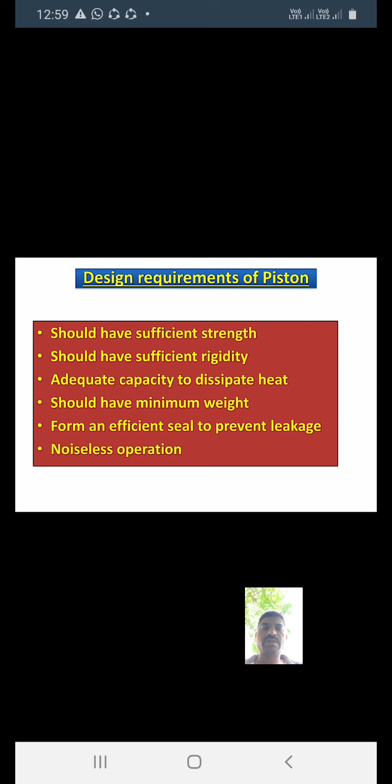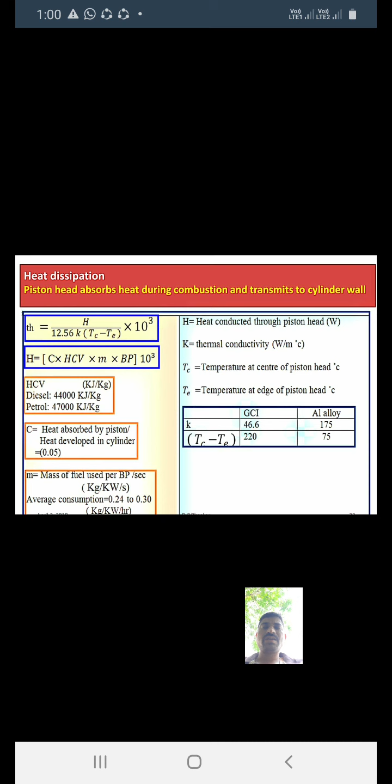In yesterday's lecture, we have seen the piston, the function of the piston, and design requirements of the piston. We also saw the piston head, its strength, and heat dissipation. When you calculate both values, as per strength and as per heat dissipation, whichever value is greater, that value you should choose for the design. Yesterday we saw the formulas as per strength and as per heat dissipation. We also saw piston ribs and cup, and you have to calculate the total rib thickness: greater than 6 mm, or less than or equal to 6 mm. We also saw the radius of the cup, discussed in detail yesterday.

Today we will go on to the piston ring. Also, in yesterday's lecture I told you about the piston ring. The piston ring is put into two groups.

First is the compression ring. In the figure I have shown the top compression ring, and second is the second compression ring. Also you have to use the oil control ring, also called the oil scraper ring.

The compression rings are placed in the groove provided on the piston barrel. The function of the compression ring is to seal the space between the piston and piston cylinder liner, and to prevent leakage of gases past the piston. The second function is to transfer heat from the piston to the cylinder wall. Remember these functions for the compression ring.

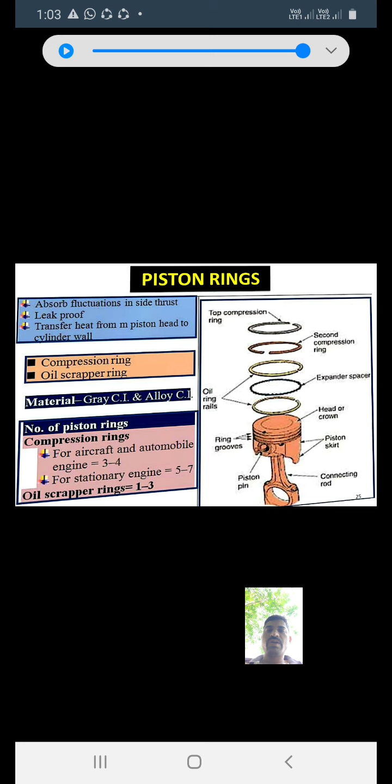Then we find out the formula for the number of piston rings, in the compression ring and oil scraper ring. For aircraft and automobile engines, 3 to 4 piston rings will be used as compression rings, and for stationary engines we use 5 to 7 rings. Then next is the oil scraper ring, we will use 1 to 3 rings.

Then next, dimensions of the cross section of the ring. We want to calculate the radial thickness of the piston ring, denoted by Tr, the radial thickness of the cross section. When you take the cross section of the ring, Tr is equal to D into root of 3Pw divided by sigma-all, where sigma-all is the allowable bending stress given for the piston ring, in Newton per mm square. This is also called the radial width.

And how to calculate the radial width of the ring? Radial width is denoted by Br, given by D into root of 3Pw divided by sigma-t. With the help of that formula you can calculate the radial width of the ring.

So Z is equal to the number of rings. Axial thickness of the ring is equal to 0.7 Br to Br, and H minimum is D divided by 10Z. This is the axial width of the piston ring, denoted by Br.

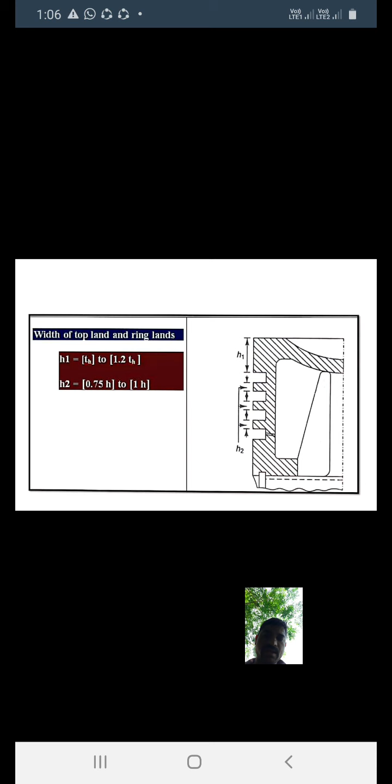Then width of the top land and ring land. There are two types, top land and ring land. This width will calculate H1 and H2. H1 is equal to 1.2 TH, this value is given. H2 is equal to, shown in figure, check the distance between H1 and H2, H2 is equal to 0.75 H to 1 H.

Then see the piston barrel. What is meant by piston barrel? The piston barrel supports the piston head. This piston barrel we have seen in the main figure in the first lecture. Piston barrel supports the piston head and provides the seat for the piston ring. Below that piston barrel there is a piston ring, and this barrel sits on that piston ring for effective heat flow. The thickness of the piston barrel is denoted by TPH. Under the ring is equal to the thickness of the piston head, TPH.

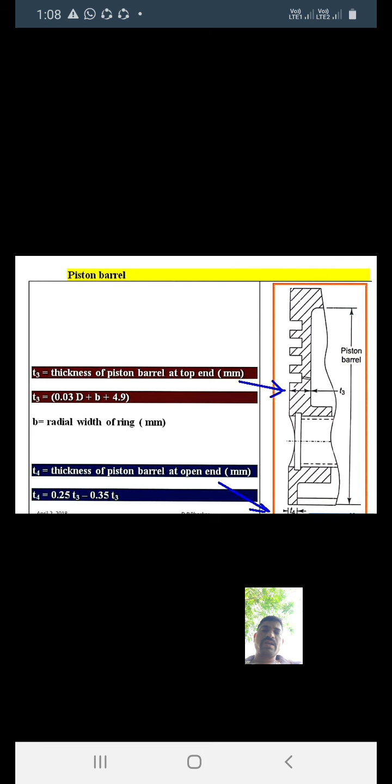Then we want to calculate the thickness of the piston barrel at the top end and at the open end. There are two ends. At the top end this is denoted by T3. How do we calculate this value? With the help of radial width we can calculate the thickness of the piston barrel at the top end. T3 is equal to 0.03D plus B, where B is the radial width of the ring, plus 4.9. Remember that formula, you will get the thickness of the piston barrel at the top end.

Then T4 is the thickness of the piston barrel at the open end. This value is also given in mm. How to calculate this value? Once you have calculated the thickness of the piston barrel at the top end, with the help of that you can calculate the thickness of the piston barrel at the open end, denoted by T4. T4 is equal to 0.25 T3 to 0.35 T3. With the help of that formula you can calculate the piston barrel.

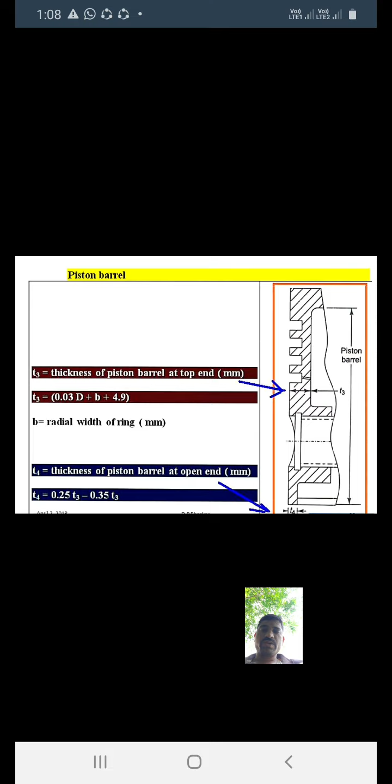Then next is the piston skirt. What is meant by piston skirt? The portion of the piston barrel below the ring. We have seen in the main figure, this portion of the piston skirt is placed below the piston barrel ring section, up to the open end. This portion is known as the piston skirt. See this portion in that figure, I have shown the piston skirt portion.

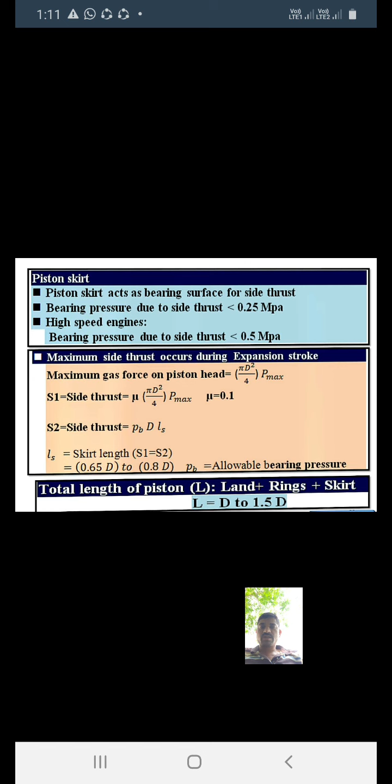How to calculate that skirt's length? You know S1 is equal to S2, meaning width of the top land plus total width of the piston ring plus total width of the land plus length of the piston skirt. If you make the summation of all that, then you will get the length of the piston, denoted by L. With the help of that you can calculate the length of the piston, taken as 1 to 1.5 times d.

S1 is the side thrust. How to calculate it? Mu into pi d square divided by 4 into P max, area into P max. This mu value is 0.1. This coefficient of friction depends on the type of material. S2 is the side thrust, calculated as PB into D into LS. This value you can calculate with the help of that formula.

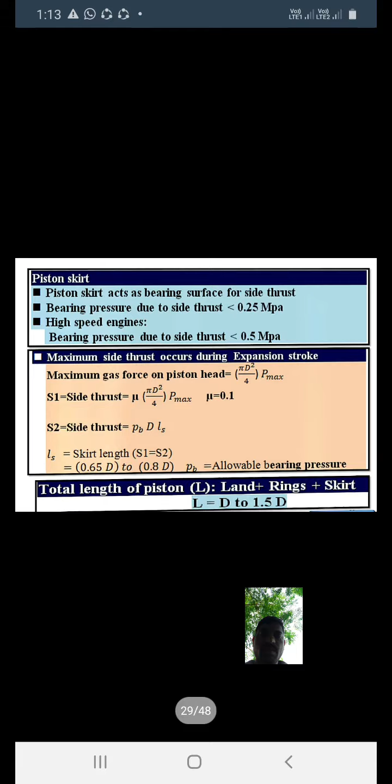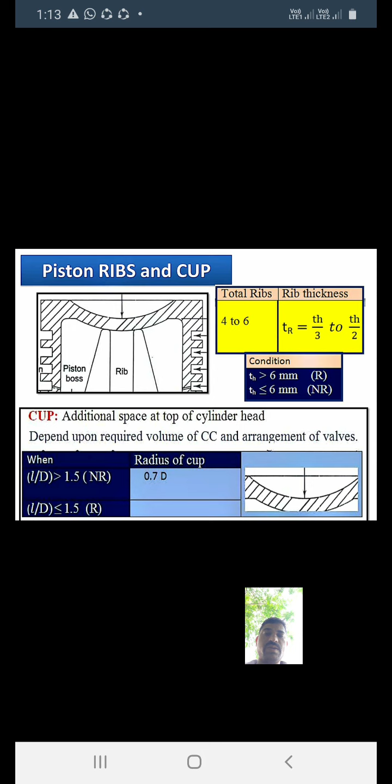There are some limitations we have seen: if TH is greater than 6 mm, ribs are required, and if TH is less than or equal to 6 mm, ribs are not required. Remember that relation, we'll use it here.

Then piston and piston pin. What is the piston pin or gudgeon pin? It is also called the wrist pin, and it is the link between the piston and the connecting rod.

The thrust developed by expanding gas is transferred from the piston to the connecting rod. The gas force should be transferred in between, from the piston to the connecting rod, through the piston pin or gudgeon pin.

We'll see the details of the types of connection between the piston pin and the piston. What is the relation between the piston and piston pin? There are three types: full floating, semi floating, and fixed.

Full floating means the piston pin is free to rotate both in the piston boss and the small end bush of the connecting rod. The end movement of the piston pin in the piston boss is restricted by using circlips at the ends. See, there are two circlips, snap rings connected to the piston pin, with the piston pin and connecting rod in between.

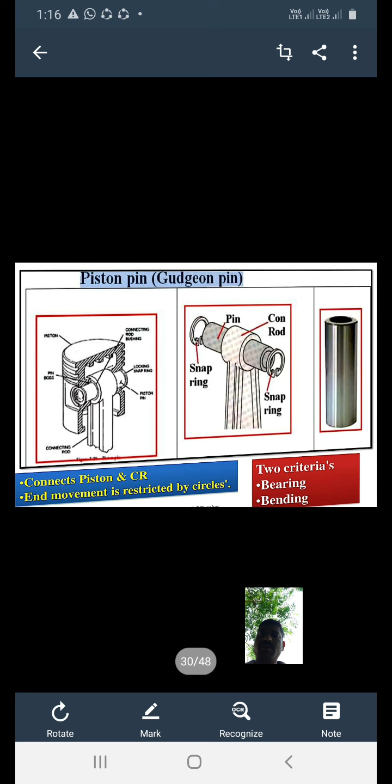Then we will see the design of the piston pin. There is a piston boss, and the small end is connected to the connecting rod. There is a piston pin in between the piston boss and the connecting rod.

In order to offset the turning effect of friction, the center of the piston pin should be 0.03D above the center of the piston skirt. We will keep that distance, 0.03D. The piston pin, as seen in the figure, is supported in the piston boss.

In order to reduce the weight, the pin is usually made hollow. The maximum load acting on the piston pin is the maximum gas force, shown by P, which is given by Fg max, the force on the piston, equal to pi by 4 d square into P max.

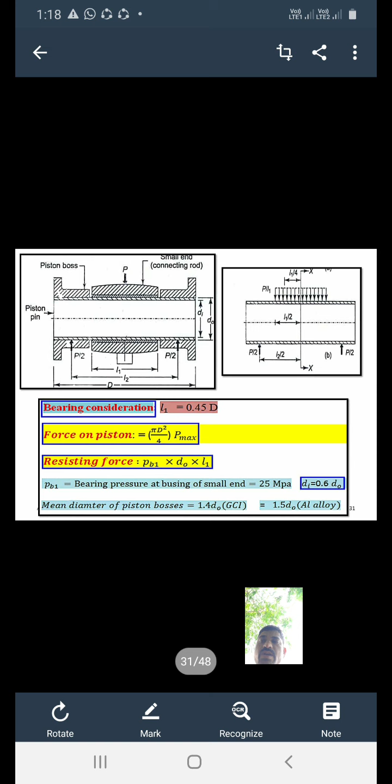The piston pin is subjected to bearing pressure, direct shear stress and bending stress. Remember that. The piston pin is generally designed based on the bearing pressure consideration, and then checked for direct shear stress and bending stress.

Here, do is the diameter of the piston pin, di is the inner diameter of the piston pin, as shown in the figure. The length of the piston pin in the connecting rod bearing is given in mm, and capital D is given for the piston diameter.

Then, considering the bearing pressure between the piston pin and the connecting rod bearing, Fg max is equal to L1 into Pb1 into do.

Use this formula for the resisting force. Pb is the permissible bearing pressure between the piston pin and the small connecting rod. Its values are given in the table. With the help of that table, you should check the bearing material and the related value. You will get the value of Pb, the permissible bearing pressure, as per the material.

If there is an aluminium alloy, then this Pb value is given in Newton per mm square as 5 to 10. And if you have cast iron, this value will change, you will get it in between 10 to 15. Remember that. As per the material, this value will be changed.

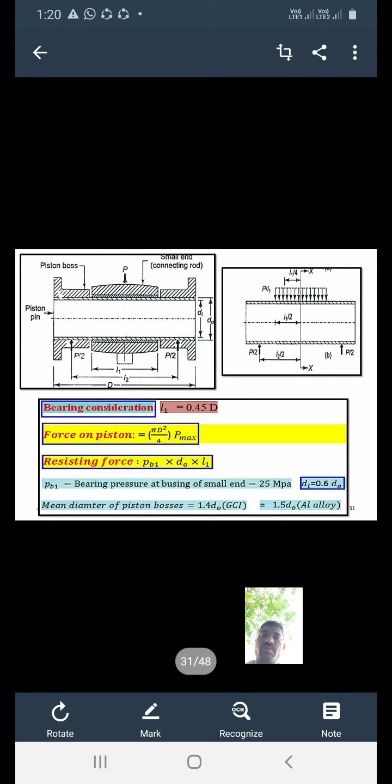Then this Fg value, force on the piston, will be changed. You will get 2 into pi by 4 into bracket do square minus di square into tau. This value will change due to the consideration of direct shear stress.

Similarly, for bending stress consideration, in order to check the piston pin for bending, it is assumed that the maximum gas force acts as a uniformly distributed load over the length. Length is denoted a, we consider it as L1. The pin is supported at the center of the bosses at both ends.

Then you can calculate the approximate length. L2 is equal to L1 plus D minus L1 divided by 2, which equals D plus L1 divided by 2. With the help of that formula you can calculate the length. You know the maximum bending moment occurs at the mid section of the piston pin. You have learned in some other subject how to calculate the maximum bending moment.

Sigma is equal to M by Z. We have also seen in the design of cylinder and pressure vessel how to calculate the maximum bending moment or stresses induced in the cylinder. Here we want to calculate the maximum bending moment induced in the piston.

So sigma b is equal to Mb divided by Z. You know Z is equal to I by y. Again, Mb is equal to pd divided by 8, and I is equal to pi into (Do raised to 4 minus Di raised to 4) divided by 64, because of the hollow portion.

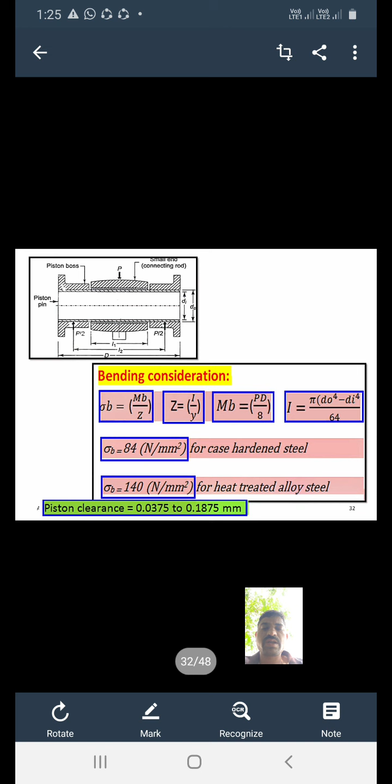Today we have completed the piston parts, so now we will see a numerical on the piston design. Given: a 4-stroke diesel engine, cylinder bore 250 mm, length of stroke 300 mm, speed 600 rpm, indicated mean effective pressure 0.6 MPa, mechanical efficiency given, maximum gas pressure 4 MPa, fuel consumption 0.25 kg per BP per hour.

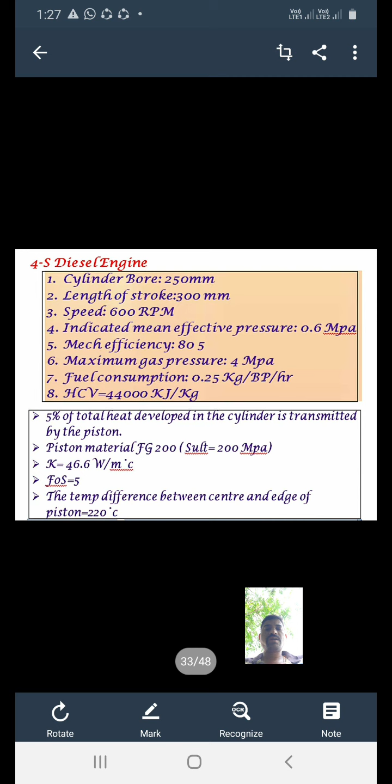HCV is given as 44,000 kilojoule per kg. 5% of the total heat developed in the cylinder is transmitted by the piston. Piston material is Fg 200, meaning SUT value is 200 MPa. K is 46.6 watt per m degree Celsius, and factor of safety is 5.

Temperature difference between the center and edge of the piston is given as 220 degrees Celsius. We want to calculate the thickness of the piston head by temperature and strength consideration, which criterion decides the thickness, whether ribs are required, whether a cup is required at the top of the piston head, and the radius of that cup.

How to calculate? We have seen the design of piston and thickness of piston. There are two considerations: first is strength and second is thermal or heat dissipation. Both formulae we have seen. We will calculate both and check which gives the greater value. TH is equal to D into root of 3 Pmax divided by 16 sigma B.

Putting the values: Pmax is the given maximum pressure of 4 MPa, and sigma B is equal to sigma T, which is SUT divided by factor of safety. SUT is 200 and factor of safety is 5. Putting the value, you get sigma B or sigma T equal to 40 MPa. As per strength, the thickness of the piston head is 35 mm.

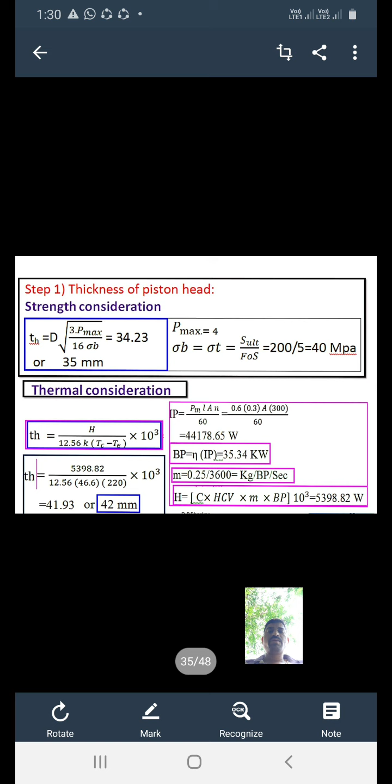Then we want to calculate the piston rib. The piston head thickness is greater than 6 mm, so ribs are required. We have seen two relations for when ribs are required and when they are not: if greater than 6 mm, ribs are required. The formula is TR equal to TH divided by 3 to TH divided by 2, giving 14 to 21, so TR is equal to 18 mm.

For requirement of a cup: L by D ratio, length to diameter ratio. Length is 300 and diameter is 250, ratio is 1.2. Since L by D ratio is less than 1.5, a cup is required; if this value is greater than 1.5, cup is not required. Radius of the cup is 0.7 D, equal to 0.7 into 250, giving 175 mm.

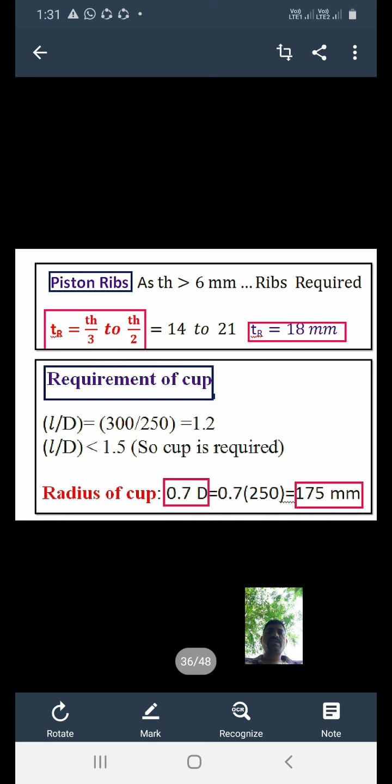Okay, today we'll stop here. In the next lecture we will see the remaining part of the design of IC engine, which is the connecting rod. This is the last important part. You will get some numericals on the basis of the connecting rod. Thank you.